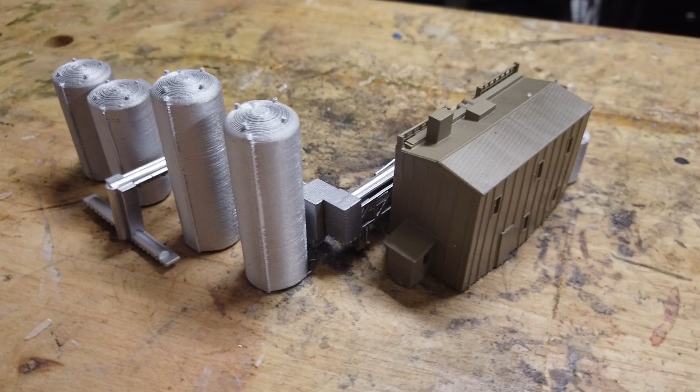A couple months ago we had a poll choosing between three different industries for me to design and print. The first place winner was the freight depot, which we designed last month, and the second place winner was a small chemical plant, which is what we are designing today.

I had to go through a few resources to figure out exactly what this needs to look like, and let's go ahead and take a look at the entire process.

I start as usual by doing my research. This one's a little different though. The reason I listed this industry is because I drive by one on my way home from work sometimes, but I can never quite see exactly the parts that will be there, so a bit more research was needed. This included tank sizes and where cars are delivered.

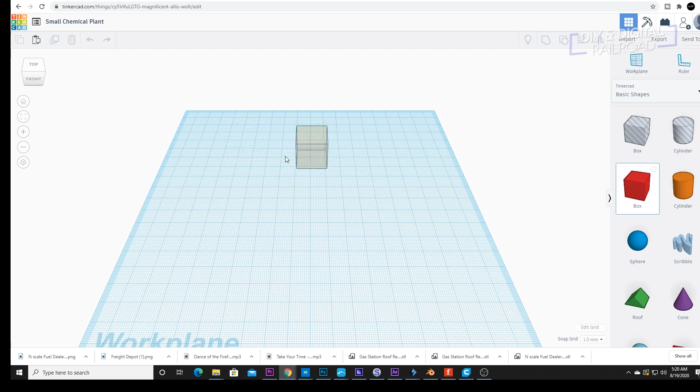Next, it's time to hop into Tinkercad.

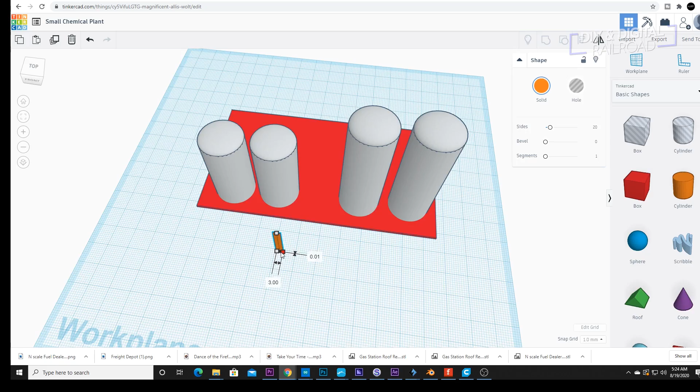My first attempt on this plan was to put everything on one plate and print it all at once, so I start with the tanks first. I create a tall tank and a medium tank with several details to get the flavor of a tank.

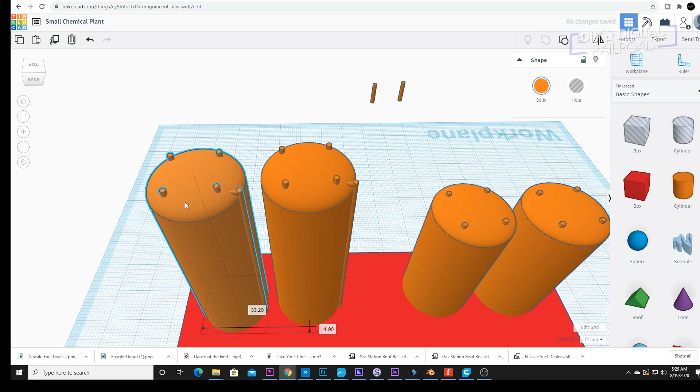Next, I designed the elevated pipes. Now, I'm not a chemical engineer, so I'm just going off purely what I can see, just to really get the feel of those elevated pipes.

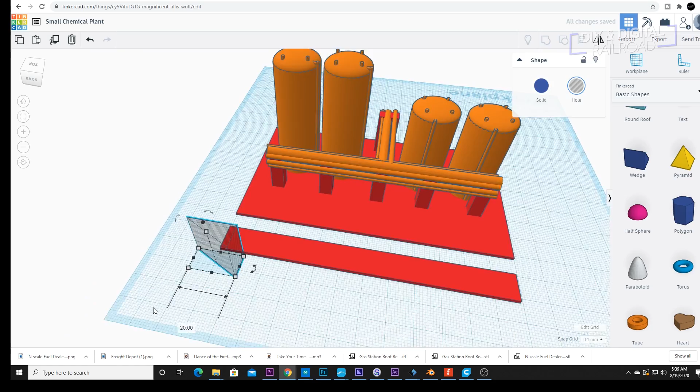I do design some crossbeam supports to hold the elevated pipes in place.

I then design a pipe that goes to the ground to unload the tank cars, since tank cars are unloaded from beneath.

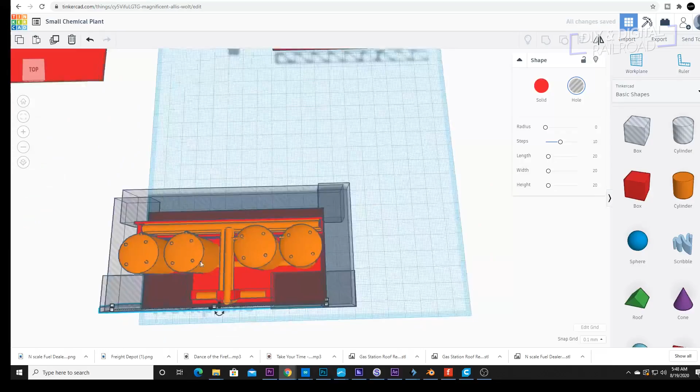Now it's time for the plant itself. First, I take a block and make it into the shape that I want for the plant. I copy the pipe and place another one right next to the plant.

I then create two small tanks and place them next to the plant, and I also add some catwalks and railings that I borrow from my fuel dealer design. I also take some additional details from the fuel dealer as well.

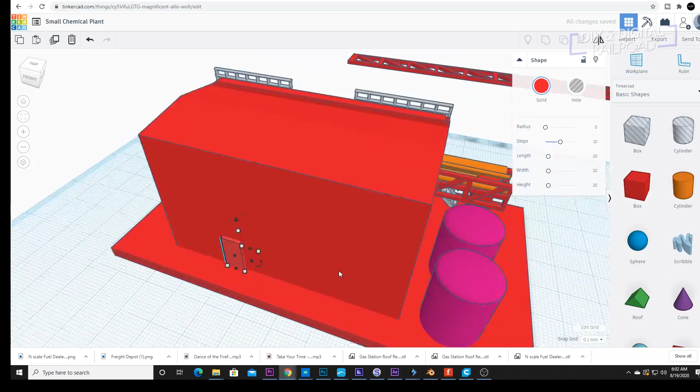I add doors, a base, and I hollow out windows and blank spaces.

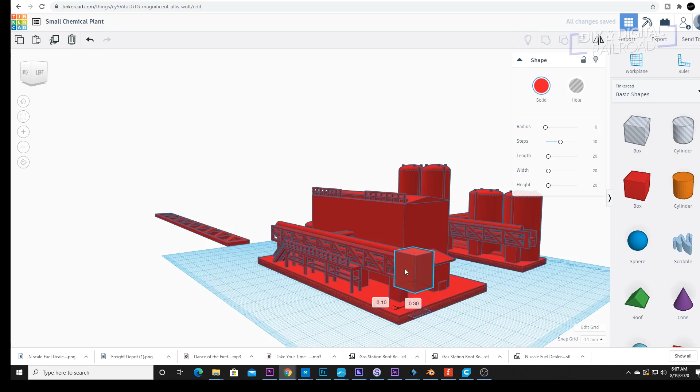Next, I add these blocks at the end of each pipe. These will be the connectors. I am pretty sure they are not prototypical, but they will make customizing the layout of your pipes and plant a lot easier for 90-degree bends.

Now it's time to make the roof. I do this by taking a block and flattening it, then replicating a bunch of narrow triangles to simulate a metal roof. I then duplicate the panel and align them on top of the building, adding some roof details such as a cap at the peak.

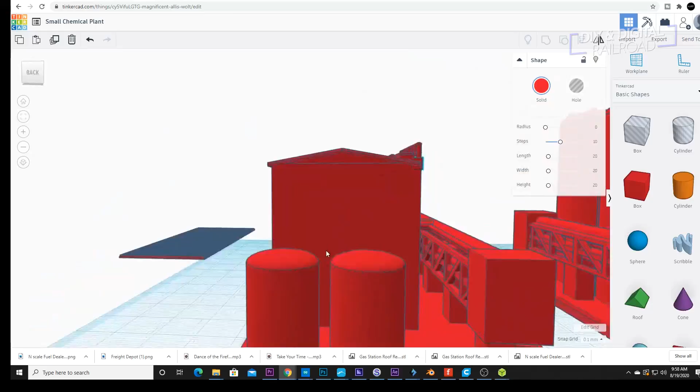Now it's time for building detail. I start by adding corners to the building, then I add some piping running along the side of the building from the main pipe.

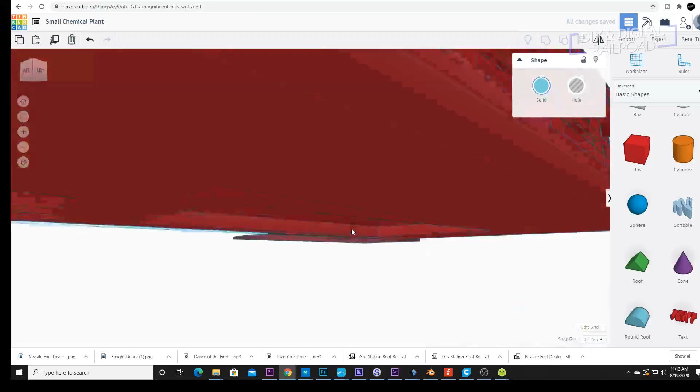I add a terminal on the roof with some spheres to round out the corners. I also add a door on the roof catwalk for access.

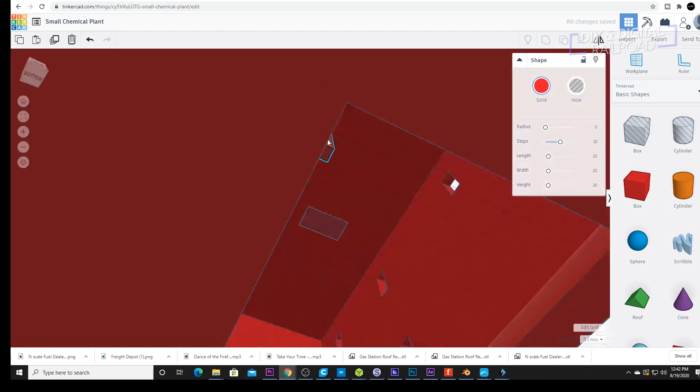Next, it's time for trim details. I trim out the windows, and then I add vertical lines on the wall to make it look like it's a metal building.

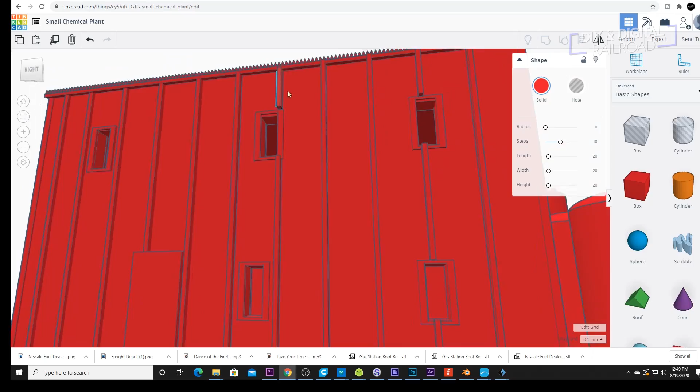And that's it for the design.

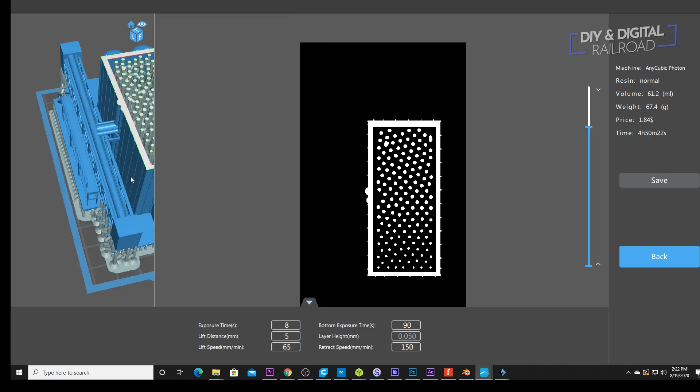Now, full disclosure, I did have to redo the base and separate all the separate parts out because they did not print well as one big part. I slice them and save them, and then it's off to print.

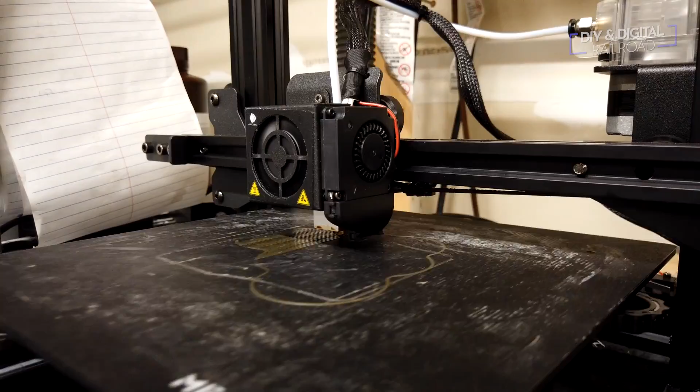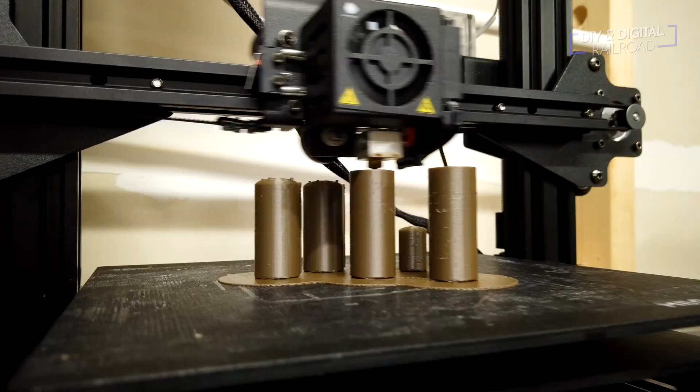All right, so we've gone through the whole 3D printing process and I've got the entire small chemical plant right here. Personally, I think it turned out very well. I still got quite a few tweaks to do in the actual printing process before I'm able to put this up in my Etsy store, but in terms of being able to print everything successfully, it took a few tries on a couple things, but it turned out very, very well.

We have several different parts. I'll go through them now, starting with the FDM printed parts, so the filament printed parts. I did all the tanks actually with the filament printer, and there are 6 tanks in total.

There are 2 tall ones, 2 medium ones, and 2 little itty bitty ones. This is one of the tall ones right here, and this is one of the medium ones right here. And this is one of the little itty bitty small ones right there. So I've got 2 of each of those. That was what will come in the kit. And let me put those back in place.

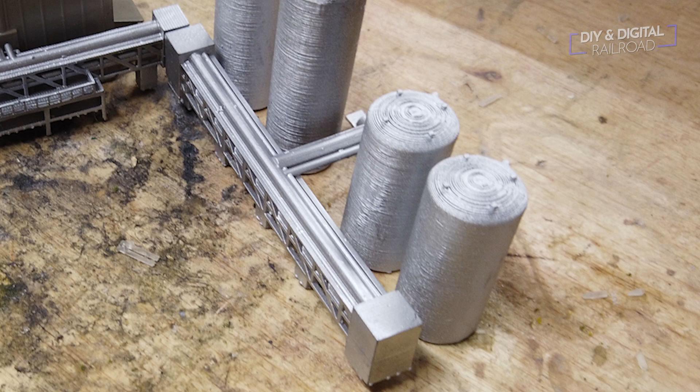Next I have what I'm calling, I don't know what it's called in real life, but I'm calling it the terminal. Basically, I noticed that you kind of had a pipe that ran away from where the fueling or offload section was for the chemicals in the rail car, and it goes to the actual plant itself. So this is designed so the car pulls up right here, and then it goes into this pipe, or it can go into the tanks, and then it goes over to the second part.

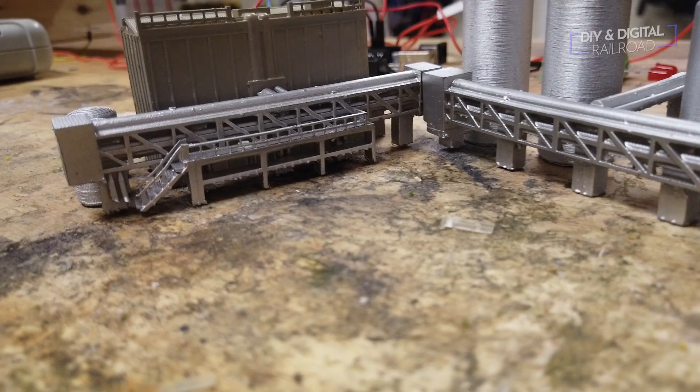I put these little square parts so you can orient it any way you want, and it goes over to this section right here, which is the part that connects to the main little chemical plant, which is this right here. So that was my design process for this.

One of the things I tried for the first time was having multiple things inside of it. I have the little grid supports with the cross beams and everything, and you can actually see a few little pipes in there. I took the railing and little catwalk from my fuel dealer design and put that on another one of the pipes that connects to the main building. I've also got some more railings and a little pipe going up top and a little door that goes onto another little catwalk over here.

I wanted the building to look like just a metal building, so I put these vertical lines on it. Personally, I'm really happy with the way this turned out. It's going to take a little bit more tweaking in the printing process to get to where I can print it rapidly and put it up on my Etsy store, because that's really the contingency for me, not if I can get it printed, but if I can get it printed easily. So I still have some work to do, but this is the N scale small chemical plant.

It'll be coming up soon, hopefully. So that's it for today, guys.